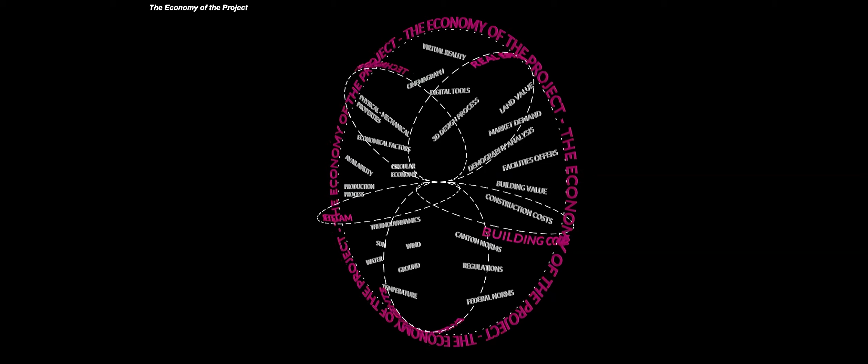I will try now to show you some recent projects, focusing more on these clusters just to make it more clear. Then I will end up with two built projects that kept us busy for a couple of years.

So the first project I want to talk about, relating more to this cluster of economy and real estate, is a competition we did in Milan. We didn't win, but we arrived second.

The main issue here was about the fact that as architects—and I underline all the time that we act and practice in Italy, so it's a really specific context—we sometimes refuse to deal with the topic of real estate, the topic of economy. We think this is a nonsense strategy nowadays, because as architects we have to be aware of what economy means. Economy is a series of rules that give form to our society, like it or not. That's the way economy works—it's a reflection of the political system of any society.

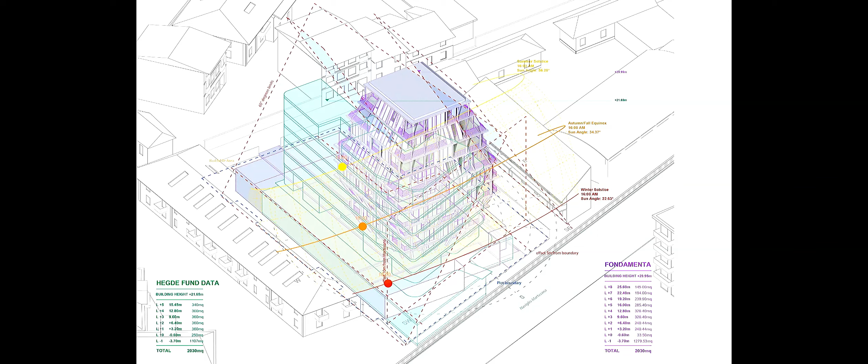Our strategy was to look at the data in order to create a building that, in a sort of cynical way, was producing more revenue for the company. So we stressed the building codes as much as possible, analyzing according to the data they gave us that, of course, if you build in height, every floor produces much more revenue—5% more.

So we tried to stress reducing the number of apartments in the bottom part of the building. For us, it's a tower, even if it's 8 floors. We tried to get out a business plan for them that was more efficient—one that would have produced more revenue for them.

According to that, we treated this building as an office building. It was all thought out with a center core for installations, staircase and lift, with all the structure on the perimeter—this idea of a prefab structure, really easy and fast to build, with installations put on a fake ceiling, moving everything onto the ceiling rather than the floor.

This produces the possibility of different floor plan scenarios, because, as we saw yesterday in Ambra's lecture too, when you work with contractors, what doesn't make sense is that when you design a building, you design it two or three years before it goes on the market. So the moment you design it probably won't match the actual market condition when the building is finally built.

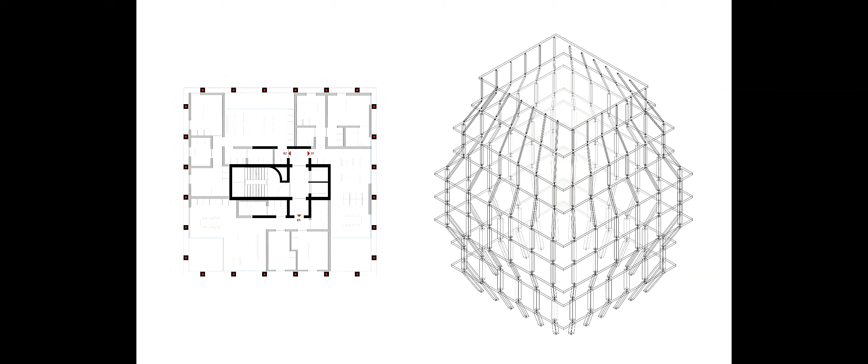So we produced a series of floor plans, saying we don't believe in this idea of flexibility—architecture cannot be flexible somehow. The idea is we build the structure first, the skeleton, and then during the process, within this dimension, this square footage, we can always apply a certain number of apartments on each floor.

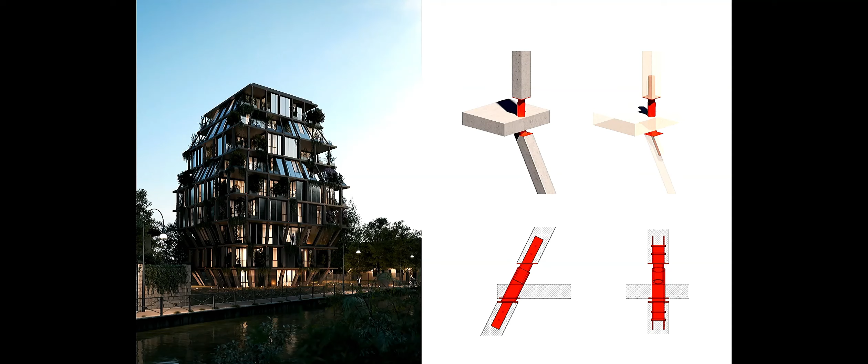And this, according to the market demand that you will have when you're going to start to sell the building, that is not happening at day 0. So this was the result, as said: about 8 floors, in between 20 and 27 apartments. That was the sort of ratio.

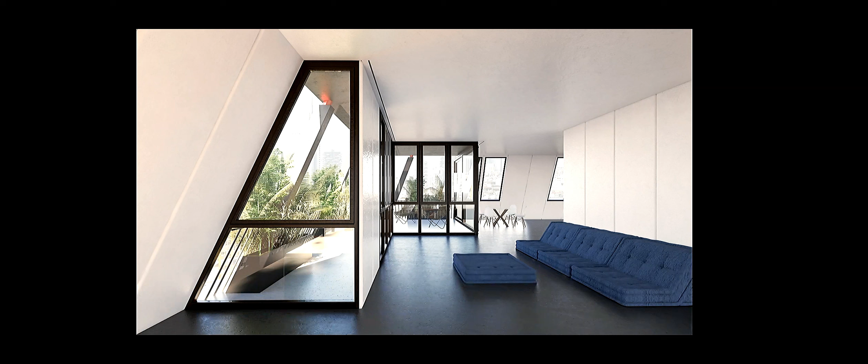We are interested a lot in having an impact on the way people live in our architecture. We are interested, at the end, in producing spaces as architects. And all those constrictions that we create ourselves have to have an impact on the way you perceive and live the space. So all these inclinations that result from the combination of regulation plus economical thought then have to have an impact on the space. For example, it creates a series of variation, even though the apartments are quite basic, where the structure and form of the building has an impact on the apartments themselves.

The second topic I want to reflect on with you is this environmental context. We love this documentary from Godfrey Reggio called Koyaanisqatsi, where he basically, for 10 years of his life, went around the US with a camera, just making a picture of the different contexts you can face in the US landscape. And nowadays, as architects, as also a young practice, we had to take a sort of position regarding the fact of building. Starting by the fact that we believe that building is the least sustainable thing you can do—that, for us, is a sort of status quo.

We want to reflect, rather than talking about sustainability, about how to use energy. It's more for us a sort of research into the possibility of giving form to energy, rather than thinking about installation of equipment that could make a building more efficient or less efficient.

We do this through really basic thoughts, because we always think that nowadays we forgot about our history and the fact that there are buildings built like 4,000 years ago that work much better than today's machine-driven buildings. So the model we have in the studio regarding energy is thinking high-tech but building low-tech. It's really about understanding the basics of what environments exist nowadays. If we reduce it to the minimum, it's about understanding the condition of the sun, the temperature, the soil, the water—really basic thoughts—and how we can translate those environments into space, into architecture.

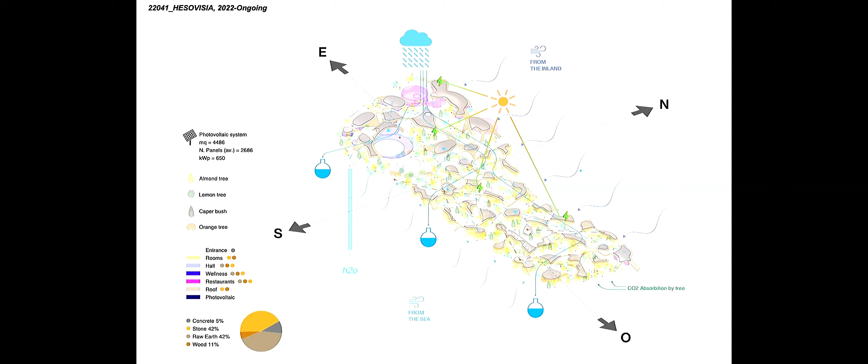But the ultimate goal of this project is to try to give form to the building according to the energy we produce, from which we give form. So we're going to use the water that we extract through wells, we're going to use the sun, and we're going to use a sort of recycling of this whole system. The building is a series of rooms that sit just under this roof, this photovoltaic roof. Sometimes those rooms are underground, sometimes they're on the ground, and other times they're hung on this structure.

So basically, it's a basic conception of creating two systems that are not intertwined. There is always a sort of gap of air in between the rooms and this shelter—like normal construction, if you think about how people normally build in contexts that are super hot. So creating a gap between the building where you stay and the sort of canopy above.

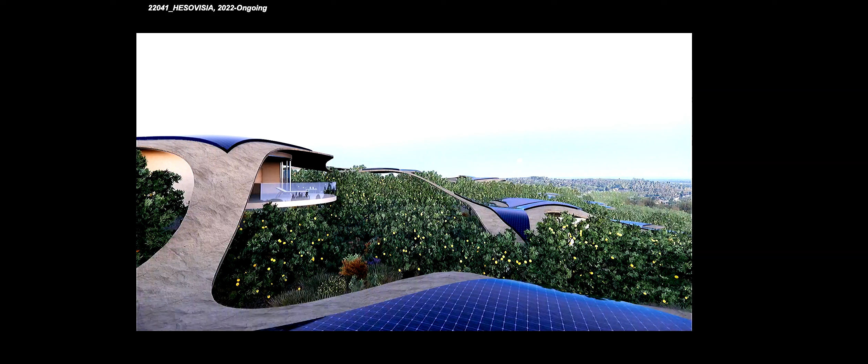This huge canopy also gives the possibility to walk through the structure, always outside, never inside. It also moves through different heights, according to the fact that we are studying how the air, the natural ventilation, could flow through the building. So it's also about the air and the circulation of these fluxes—it gives us criteria to understand how we take position, how we define criteria.

The third project that reflects upon this series of clusters is the one of the building codes. Coming from a Swiss context, this could seem like nonsense, but you have to think that in Italy, each city has its own laws, each village has its own laws. So it's the most inefficient way to think about regulation, and it really changes place to place.

So it's really a work to understand norms, not just as a series of rules that frame our intervention, but more as a starting point to produce architecture. This project, now in construction, is about this story.

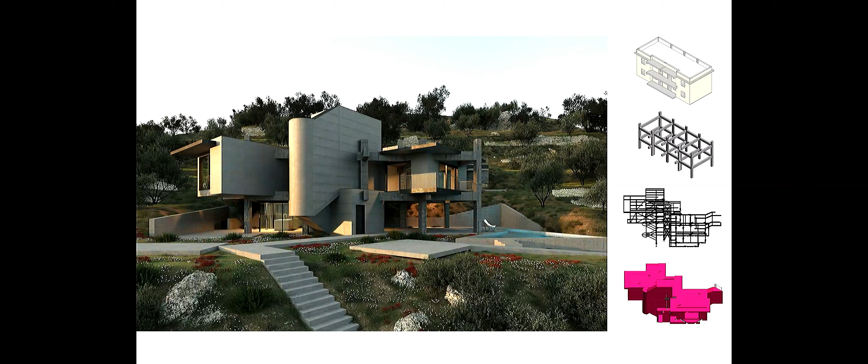So basically what we did is exactly the following: it's a cynical, speculative project where we tear down everything apart from the structure, liberating this domino-system structure. And then we put inside a second steel structure, reusing the volume in a different way.

It's a house, and the idea was to free the ground floor and use a series of rules through which we define the space of the house, creating a dialogue with the existing structure.

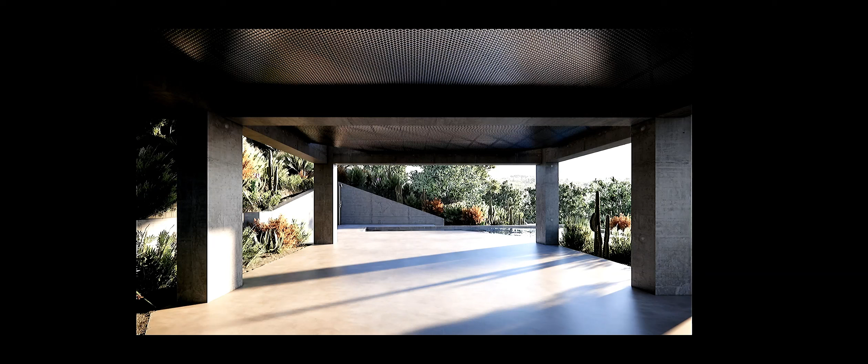We couldn't change the level of the floor, so we had to respect exactly the height of the existing floor. We were quite stuck with the idea of not having too much freedom in terms of height that we had to respect. These are a series of renderings that show this idea of taking the volume off the ground floor and moving it up.

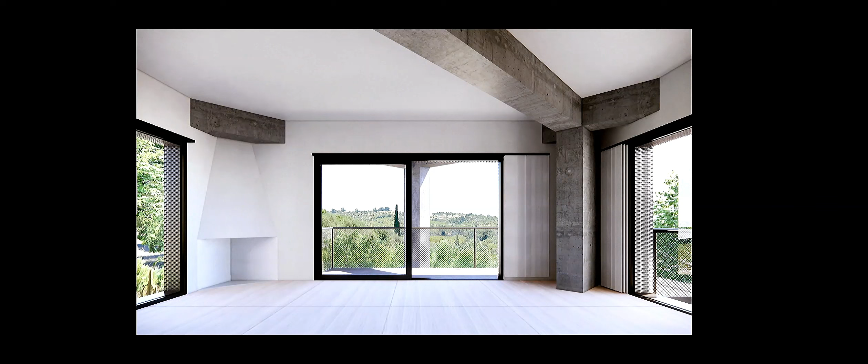On the first floor, the house creates this dialogue in space with the existing structure, where the spaces are defined by the program, from sleeping rooms to living rooms.

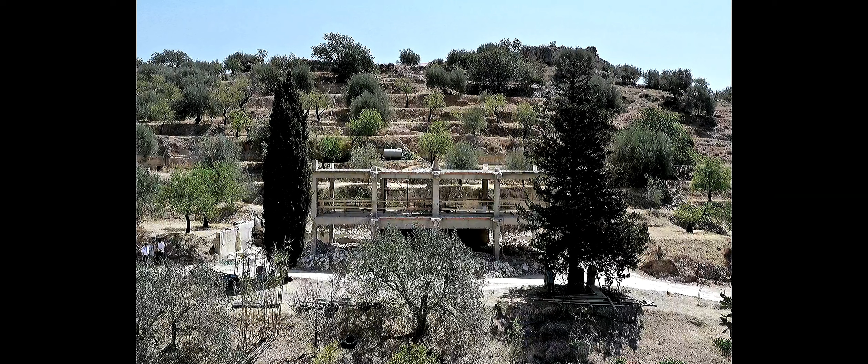In order to control all those things together, this video shows how we coordinate with the people we work with through this technology, where they're not just implementing things during the process, but we work together with this team sharing a common language and technology. The building is now under construction.

These pictures show exactly the demolition. This is the existing structure where we took off 3 centimeters of concrete just to be sure the structure was working, because the steel structure we put in had to be supported by the existing structure, so we couldn't lay the new structure down on the floor.

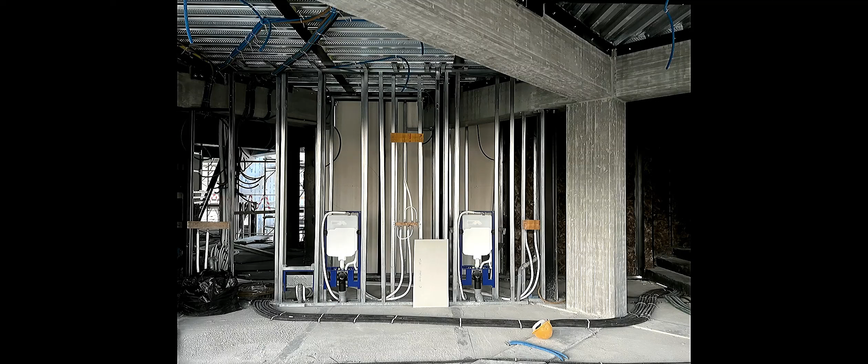Then arrives all this series of light structure. The house inside is really simple, it's plaster, and it creates a series of moments where it starts to dialogue with what was existing.

Basically, in this context of southern Italy, building with this sort of technology isn't too smart, because a light construction in terms of thermal transmission isn't efficient, there isn't enough mass.

So what we did is cover the building with this net to create a ventilated facade. We deliberately decided to wrap the skin in order to make the building ventilated, just because we didn't have enough centimeters, enough dimension, to create proper mass. The building will be finished, hopefully, in a couple of months.

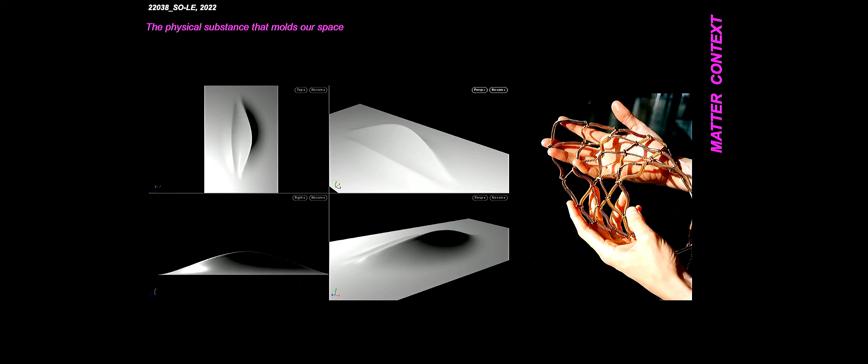The fourth episode, relating to the cluster we're taking into account, is the one of matter, where we are always interested in the studio to think about architecture as a research, as an open dialogue. So we try to test as much as possible the use of specific material according to structural condition.

In this case, we were asked to make a retail, a 45 square meter retail shop, and it was the first time for us to think about architecture at this scale, for a jewelry designer who was able to have a super small spot on the ground floor of this nice building that opened recently in Milan.

It's a fantastic new square that connects two of the most important points of the city, so it's an open public square. What we did, basically, is we started to reflect on the idea of the designer and her sort of dreams on how she designed this jewelry, about the idea of deformation, about the idea of surrealism.

She is able to produce jewelry that looks super heavy, but they are made out of really thin paper material. She used leather, so she worked with this contradiction. In working with this organism, she called her jewelry body architecture.

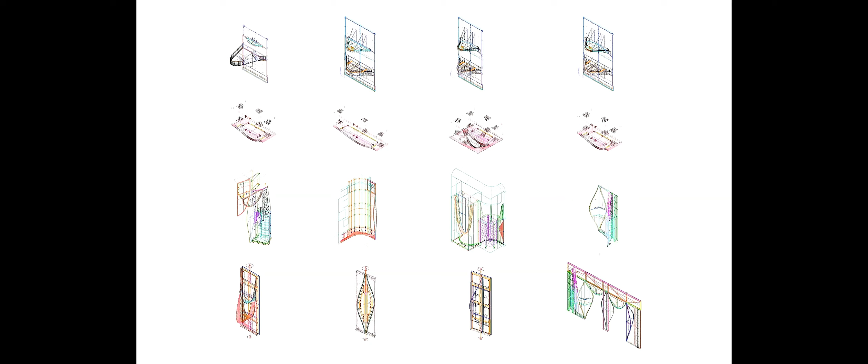It's something really different working on a retail project, because the time is super fast. This project from day zero to the end lasted 5 months and a half, 6 months from first sketch to construction. It also relates to a topic we weren't used to thinking about, that is artificial light. Of course in buildings there is artificial light, but in retail, where you have to put the focus on the products, it totally changes the rules of the game.

It's no longer about the space and the human being, it's more about the space and the object you want to highlight. So we started with this digital light model in order to understand how these tactics we used about deformation, so pressure and depression of the surface, could have an impact on the light.

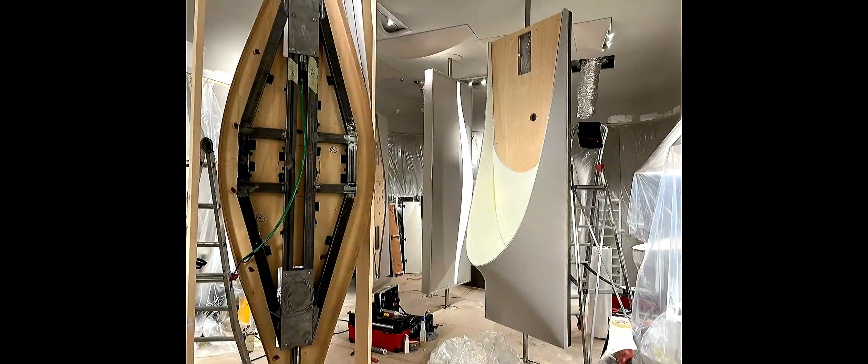It was really funny because it was always all produced off-site and then mounted in 7 days, basically, in the shop. The floor is made of rubber, so it's really soft. The idea was to be able to put these surfaces also on the floor, trying to use material according to the possibility of walking and living in a space.

They also change the anatomy of the body, so the space should, we hope, have an impact on the body from an anatomical point of view. Those are pictures from Mikael Olsson, a photographer and friend of ours, who took snapshots where you can see the jewelry always placed on the surfaces, sometimes laid down or hung upon those elements.

So basically those were the intro relating to a more recent project. I just want to close with two buildings. The first is this winery, basically the first building we built, a project that we started in 2016 and was then constructed and finished in 2020.

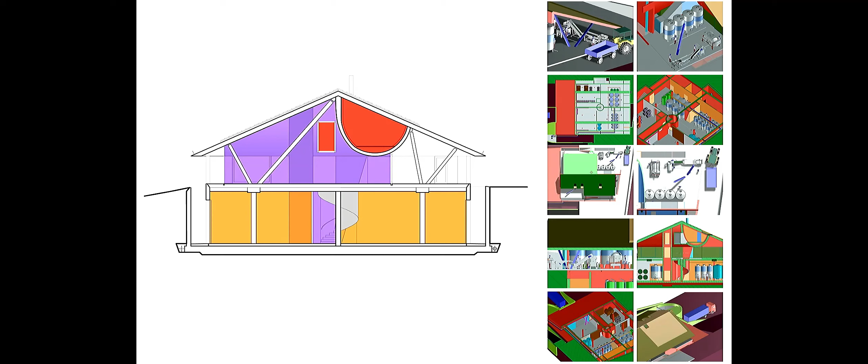So the building is all about this roof, and the fact that this roof conceives and produces the organization of the space.

The main elements of this roof are two structural beams that also work as lived-in space - this is where the three rooms are where you can sleep, also defining the space underneath. It was done through formwork that was suspended for the entire construction.

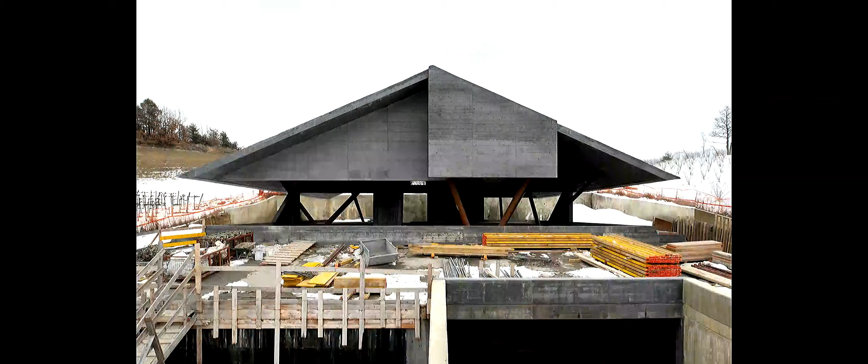It was quite an effort to build, because the entire structure only started to work the moment we poured the roof. We suspended the entire structure for 8 months, and the only moment the building truly worked was as soon as the roof was poured and all elements were working in tension and compression.

On the underground level it's out of pillars, out of concrete, and then from the ground floor these pillars start out of steel, because steel was the better solution for the loads they had to take - these tension pillars don't work in compression, but in tension.

This is the moment - these are pictures from Mikael Olsson - where the organism declares its independency. So the building, for us, was conceived.

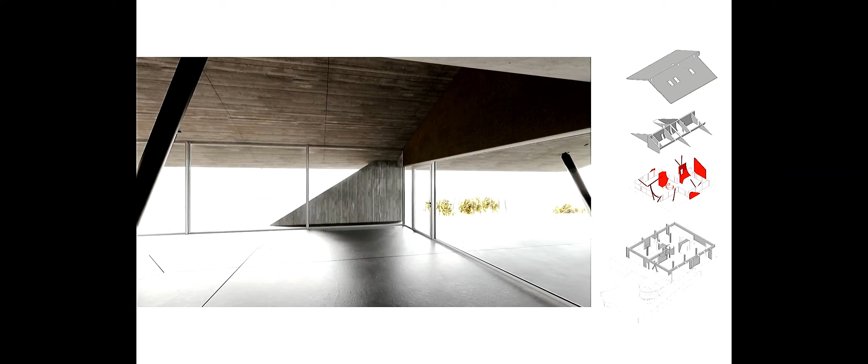After that moment, this idea of adding layers into the building arrives constantly - not trying to disguise the fact that there's a structure, a series of layers that make this organism work, but showing off the fact that all the other layers, like windows and these pipes that form a corridor, were just attached as an addition of elements that make the building work.

As you see, the space has no walls, but is divided by the form of the roof and the position of the glass. This is the finished building.

We are here on the ground level, the mid-level, which is also the entrance, where two things happen at the same time: the entrance of the people and the entrance of the wine. The wine goes in on this level, and by gravity goes down, arriving in the basement, where we have a really rational building floor plan.

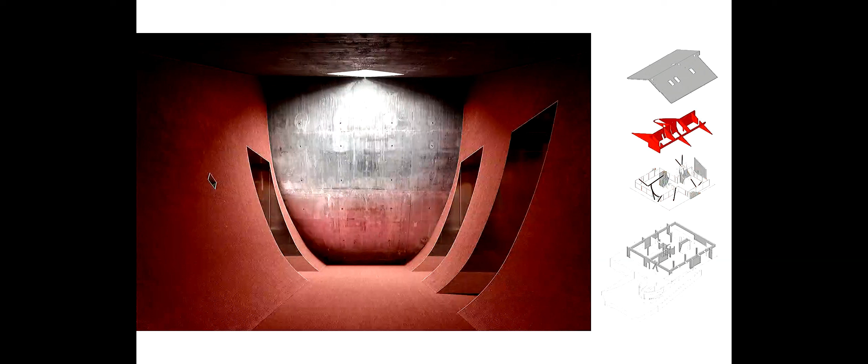It's divided into 4 areas that are the areas of the production. Going up again on the ground level, you see this vertical concrete shaft and this pipe that is a corridor that brings you to the rooms. And those are the sort of compressed rooms where you can sleep.

From outside, we actually like this tile that we were forced to put in, but we understand that all the buildings in the area are covered with these tiles. Still, we declare that it's a juxtaposition on this roof.

And then I close with this project called Experimenta II, which is something different. It's also a territorial project. We are in Sicily, between Noto and Avola, where a client asked us to find land for making a house. We ended up finding a bigger area, so we were able to follow the whole process.

We found this abandoned area in this context, which was 21 hectares. It started a really long process of finding other people interested in taking part in this project. The project is about reusing these 21 hectares as agricultural land, to reproduce lemon trees and olive trees, and to place inside the minimum amount of infrastructure needed to make those things possible.

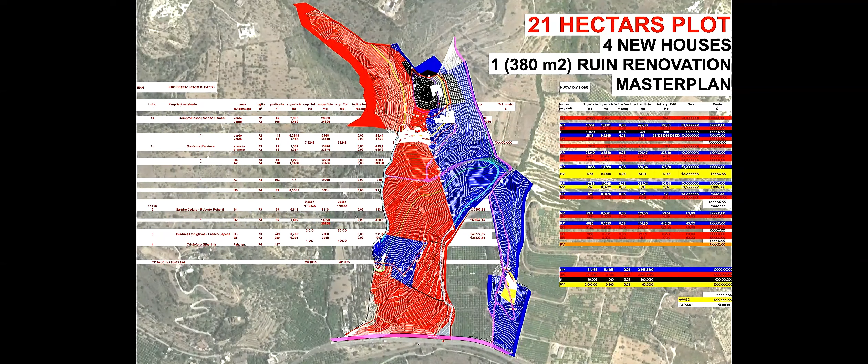So what we did was find people who believed that speculation in this sense would not have been the solution, but that we should give something back, not just say you buy 21 hectares and spend a lot of money to raise lemons.

So we basically started with research on defining the precise spots where we place the infrastructure, where the idea was to relate to this specific, quite crazy context that we have in the area.

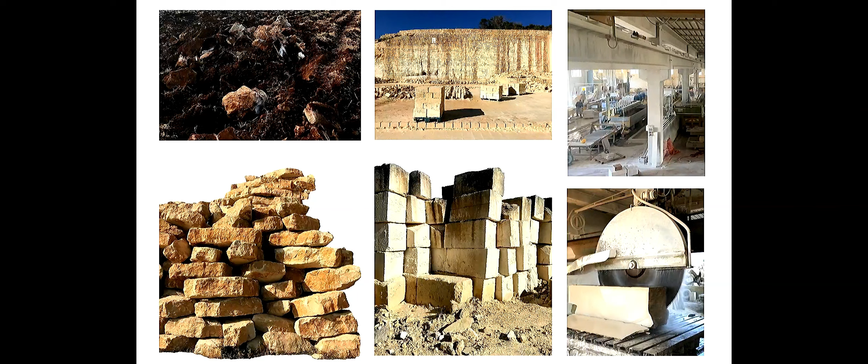On the second layer, we were interested in working with local material and doing research on stone, since this area, because of earthquakes, is a SISMA 1 area, meaning it's really difficult to build. For 30 or 40 years, they've used stone just as a finishing, not anymore as a structural material. So we started from the beginning to understand what the possibilities were with stone.

We had two possible stones. The one on the left is called Modica stone, and you find it not through excavation, but by digging into the land. It's like a kind of granite stone, so more performant than a concrete wall.

The one on the right side is called Noto stone, and it's the one used during the Baroque period to build everything. It's really fragile, so if you use it structurally, you have to use big format. So at the beginning we started this research, understanding where this stone was, how much it cost, and how we could reuse it in terms of technology.

Then, of course, we put together the third layer, which was understanding the context in terms of history. The Sicilian Baroque is a really specific Baroque that has nothing to do with the Baroque we know more as architects, like, for example, the Roman Baroque from Borromini. But it's a Baroque that manifests itself in the open space, in the public space rather than in the buildings.

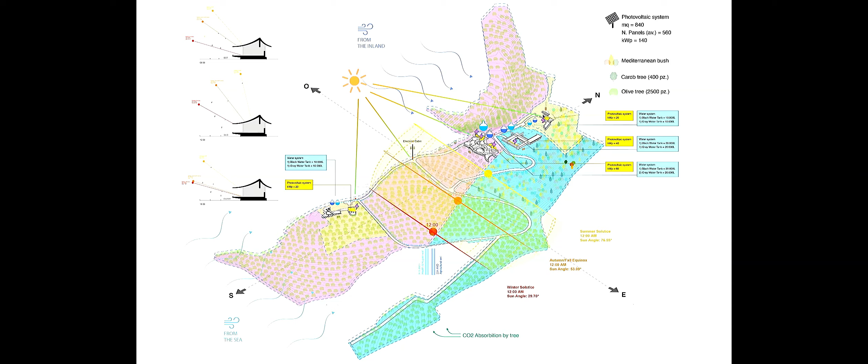Similar to the hotel, all those buildings work with the same water well, and they try to be efficient in the fact that they use energy through just solar panels. This was really important for us, to find an economy of means in doing four things into this landscape.

We call it infrastructure just because we deliberately decided to let those buildings not belong to the world of the house, but to the world of the infrastructure. Touching and designing into this landscape is anyway a brutal act.

We believe that understanding those houses not as normal Mediterranean houses, if we think about the Rudofsky references that were shown yesterday, but more as a new way of living, the outside covered space could have been a solution, or at least this is what we were comfortable to think about.

So you see the 4 infrastructures, 3 of them are built. The one in the middle is not, it won't be. I'll just go through this series of pictures that are from a couple of weeks ago. So this is the first one.

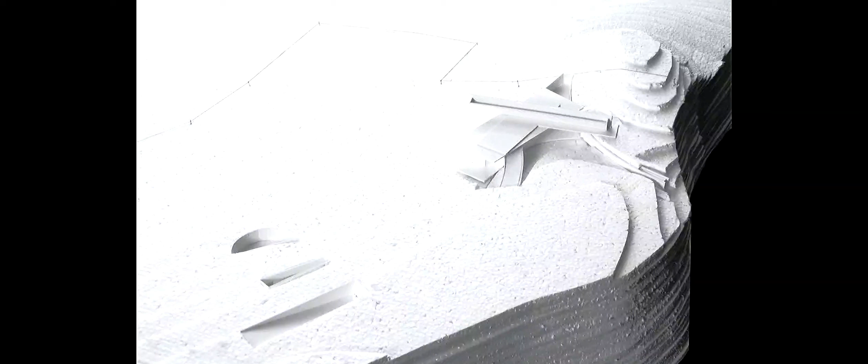It's an infrastructure that works with the idea of something going through all these houses, to compress as much as possible the moments where you live into the space. So compress the closed space of the house and expand, through the dialogue with the landscape, the outside space.

So you have the rooms on the right side, the living is on the left, that is divided in 3 parts. Then you have this tank, this pool, that is used as a tank for recycling the water. But of course, you can also swim in it.

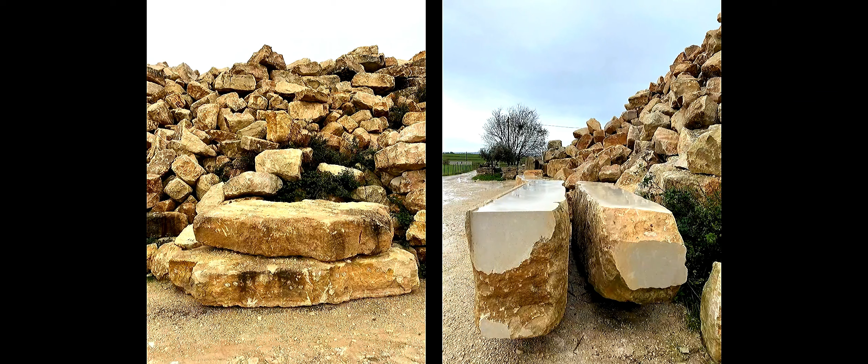The main structural point or issue on the construction was about this element out of stone, this Modica stone, where we built up walls according to finding those pieces, understanding what was the structural potential out of that, and using it to support and divide the space.

So this is basically the wall where on top sustains the slab and this tank. This tank was done out of steel, built offsite, and I put it inside. And the house basically...

tries to change the way in which you should live into this ecosystem, which is more about compressing the spaces that are inside.

All the roofs are designed through the fact that the sun should never touch the glass, the sun should never enter the space. You enter them from the living room into this sort of tunnel that is 25 meters long, which brings you to the rooms that are excavated into the landscape.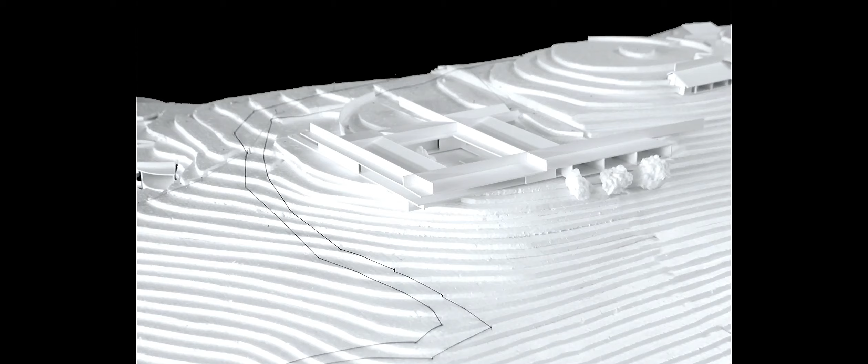The second is an infrastructure that works on just one level. Let's say that we define this moment of the hill that is more placed on the top, and we compress all the spaces that were closed spaces through a series of walls out of stone.

Trying to define what was the minimum space to be lived inside, and building almost double the space. So all those houses are bigger on the outside covered space than inside, through these series of shells that define how the light should get in and how you should protect yourself with shadows.

It's, let's say, basic in terms of construction. So the company, a Sicilian company, used proper old school tactics to make, for example, the formwork and to build it. It was amazing to build up the process with them.

This project at the end took 5 years, so it was really a long process in order to arrive to the definition of this exterior covered space. Also here, the tank is placed on a beam.

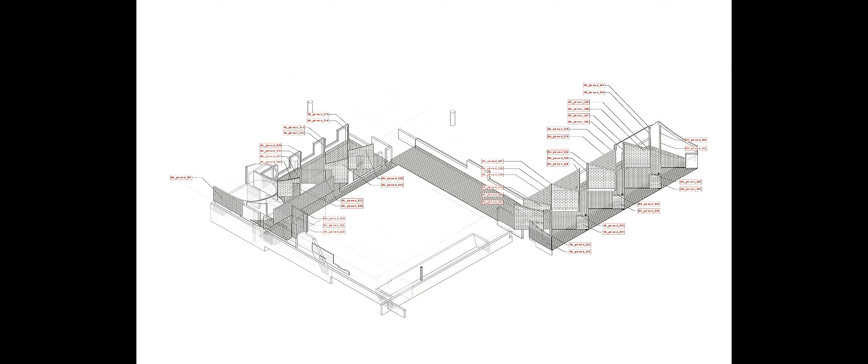As I said, this is the series of walls out of stone that in this case are not structural, but they define exactly how it's possible to live, where we always compress the space they bring you through the rooms. In fact, the inclination of the interior space follows another logic.

It creates much more the idea of having this roof flying over your own roof.

And then the third one is basically the smaller one, but it declines the same principles into this series of infrastructure. Even in this case, the infrastructure is formed by the simple idea of having an area that is the sleeping room.

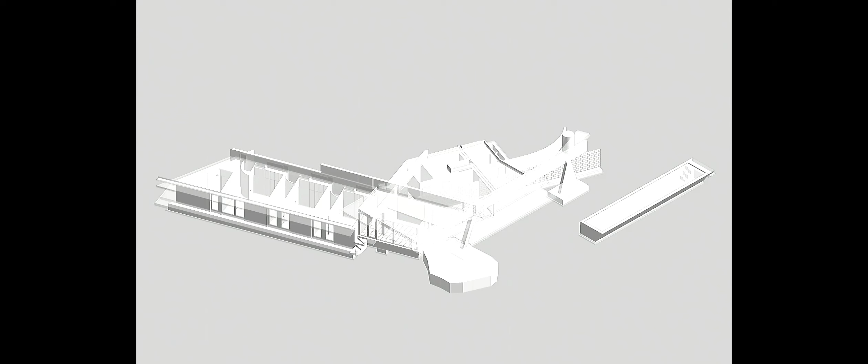facing east, northeast, and the living room facing north, through a series of beams that define exactly the moment of how to hang these two different roofs.

In this case, we tested with this Noto stone the possibility of building also structural walls. So it's a series of stones that are tied together with these dowels, so that if there is an earthquake, they are able to move.

We hope so. This is basically the house at the moment, where the ratio between inside and outside is almost always equal. Even in this case, you move through a compressed corridor in order to arrive at the views.

I close with the one that was not built, and of course it was the one where we put the most effort, as always. It's about an infrastructure that reacts to an existing water tank in this case, so the water tank was given. This house reflects on the possibility of reusing a sort of morphology, and making up through the three-dimensional axis of this morphology the creation of space according to the given program.

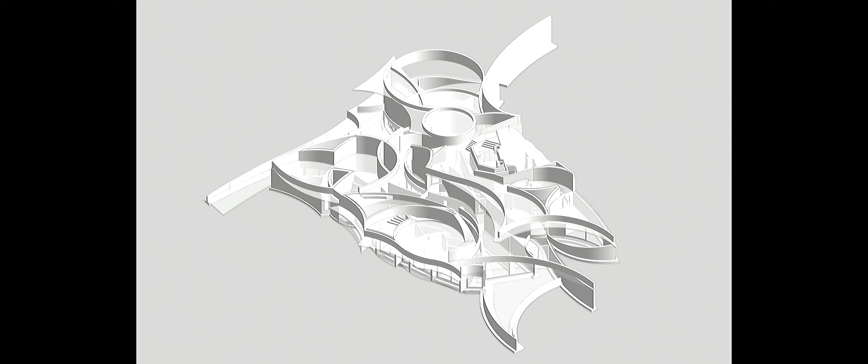The idea here was to build everything basically out of stone wall, so 90% of the wall, and through the ideas of deforming or metamorphosis of the space, the wall became beams, the beams became floor, just using obsessively the same sort of logic.

The house in this case was 80% underground, and it gets light through courtyards. Even in this case, the project stopped on the first day of the construction building, so it was killed at day one of the construction process.

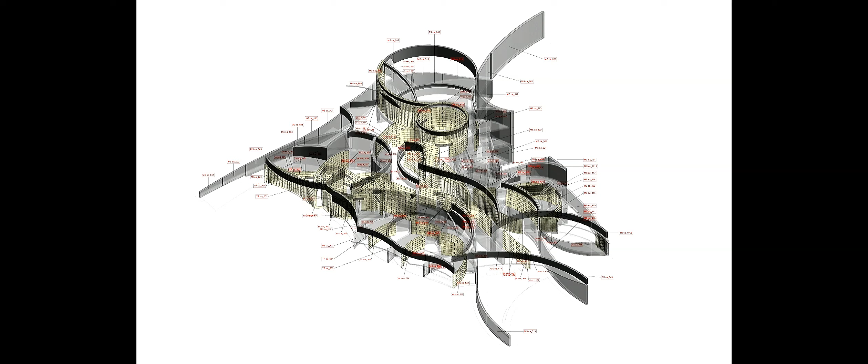So we were able to arrive at the end somehow through the control of all the parameters that we were making up in the office. For example, just to give an example, we were able to control also the construction of the wall. We always go through model to real model to digital model. It's a mock-up, one-to-one, that we did in the office.

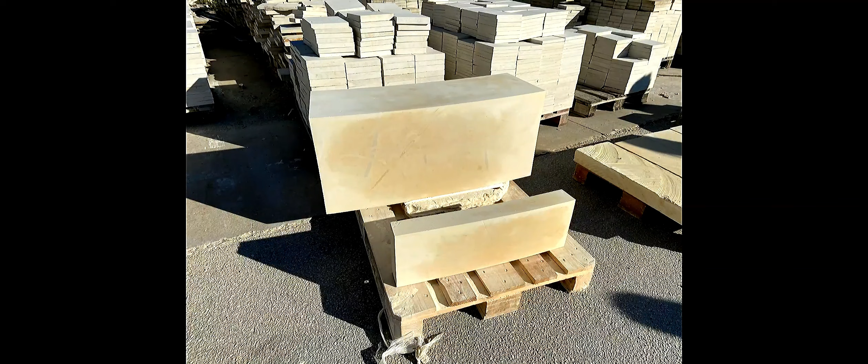We always close this project with this module, the module that was done through the concept. So we started through the concept with the possibility of how to build it, and then tried to work out a discourse out of that.

Yes, this is the building. I'll just close with two slides, more related to the things we are doing with the students here, about how we tried last year to bring this idea of methodology, this economy of the project, into the university. There was a course, two semesters at the ETH, where we basically tried with students to implement this idea of having a methodology and applying it to the project.

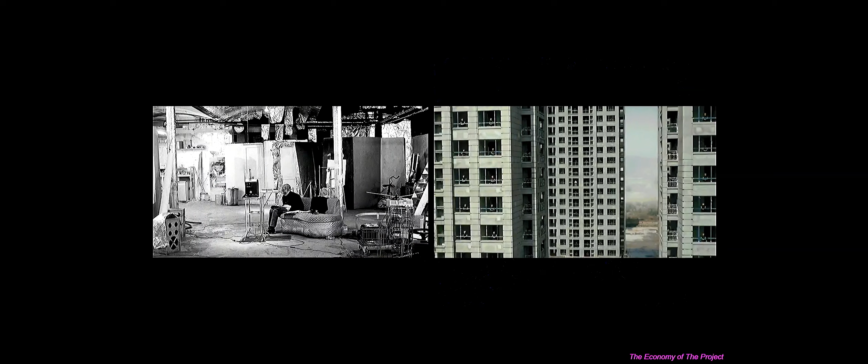So, how to extrapolate data from a context that was Switzerland. We defined an economical context as Switzerland, then went through a selection of plots through companies, and worked with the students using just economical parameters—so no program, no user, nothing. Extrapolate the economical parameter the company wants to achieve on those areas, and out of that, create your own building, your own program.

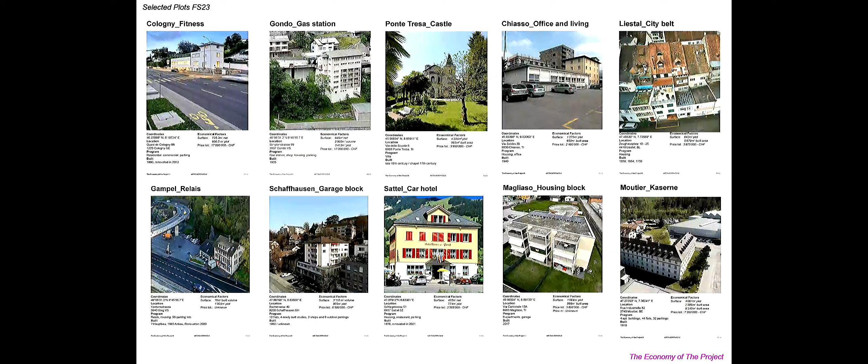The first semester was done on a free plot, and the second semester was done with a building taken from the real market, but an existing building. Then we made up a sort of manual about this methodology, with chapters giving a toolbox of how to relate to this cluster, how to read economical data, how to extrapolate environmental parameters—a sort of toolbox we were able to extract from the Swiss context.

If we had done something like that in Italy, it would have probably taken 10 years. We were able to do it because all that data in Switzerland is open source, most of it. It was crazily nice how you can get data and information according to different clusters.

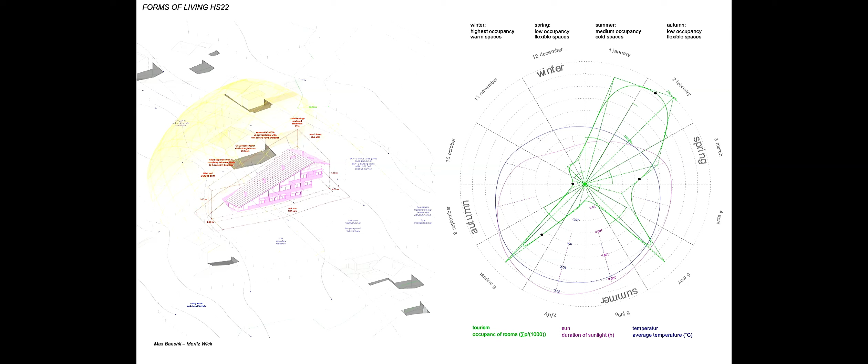The idea with the students was to give form to strategy, always deciding which of those parameters could make sense in terms of economy, twisting the paradigm. These are examples from students where they worked a lot on drawing and legislating, let's say, mixing together economical parameters and the idea of having a strategy that has an impact on space.

We then implemented this idea of a technology called cinemagraph, where the ultimate idea was to represent space in movement—but not the movement of the body, the movement of all the layers that are normally difficult to give form to. It was a nice trial, let's say.

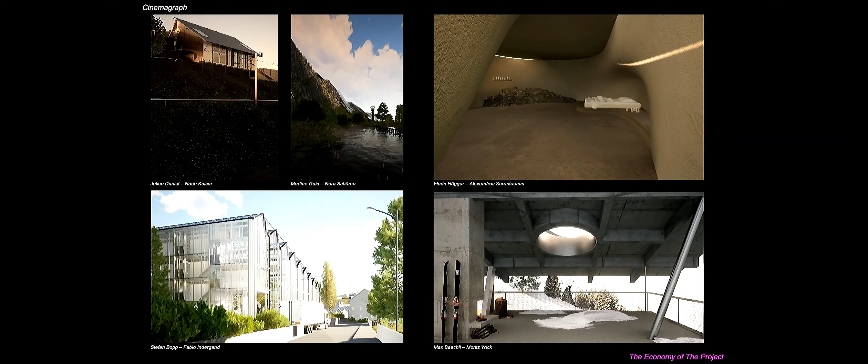Thank you, Federico. Does anyone have questions?

Thank you for your presentation. You started talking about the Italian context, and my question is specifically about Milan. Every year there are at least 6,000 more architects there, which explains why it's difficult for young architects to emerge. I'd like to ask: what did you find most difficult working in such a difficult context? And what was the approach that made it possible for you and Fondamenta to emerge?

What I still think about Italy is that it's a country with huge potential and possibility for architects. The problem isn't really a problem—the possibility is plenty, there's a sort of void where there's a need to build, a need to do a kind of building architecture. The real problem is more about the system—it's really difficult in economic terms to make an office survive.

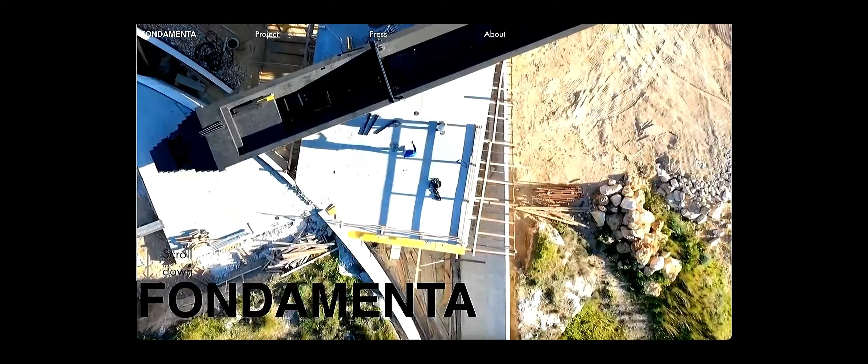The most difficult thing was that for the first two years we were just trying to find projects and find someone who believed in us, because you can't really count on public competitions the way you could, for example, in Switzerland—even though in Switzerland it's not so easy now either in terms of numbers. But there, you can't count on the public sector at all, that's for sure.

We do two public competitions every year in Italy, and we do it as an exercise just because we want to work at a different scale, since we mainly work on private projects, small-scale things, or housing.

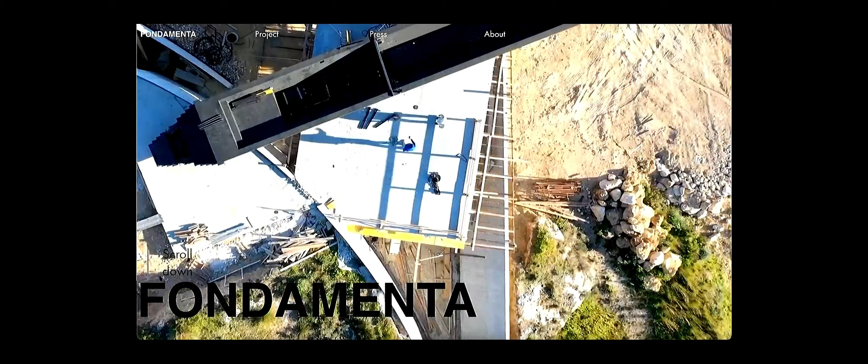During those two difficult years at the beginning, we understood that most of the potential clients or people we were talking with weren't interested at all in architecture—they were interested in talking about architecture in another way.

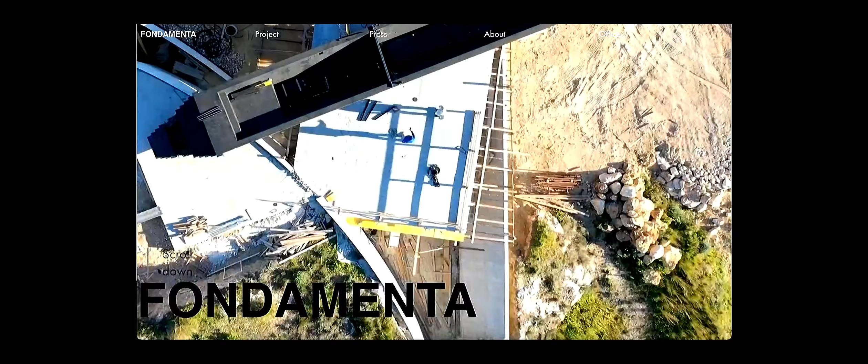That's why we implemented this idea of also talking in economic terms. We tried to switch the paradigm of how we confront ourselves with clients or contractors—trying to speak through their language, their meaning. Because in the end, they're not interested in what kind of building or architecture you do.

They're more interested in whether you earn their trust—or maybe not trust exactly, but whether they give you a job. If they understand that you're able to understand their world and how it works.

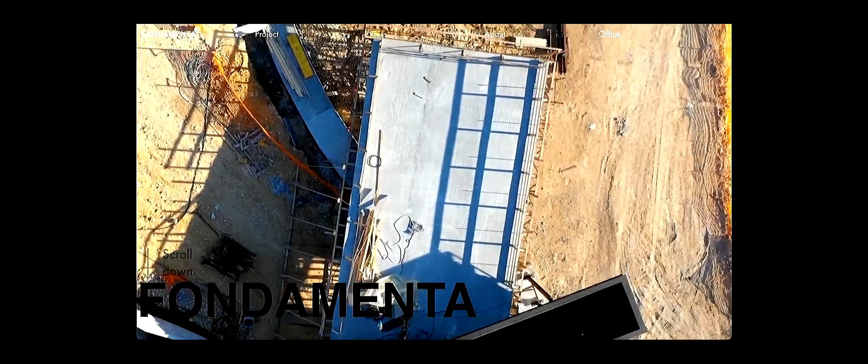So that was the most difficult thing—we completely switched our way of working, we adopted this approach, we entered into the economics of the project, not just because we wanted to, but because we saw it as the only way to face the Italian context and change the attitude: not positioning ourselves as the architect who arrives with ideas, but as one who tries to understand the context and works through those layers as a design principle.

I think that's what made it possible for us to survive—this twist of introducing, from day zero, layers or forces that you normally wouldn't count from the start, talking about Excel sheets to explain a concept. This is basically what we do, in order to have freedom afterward in producing the architecture we're interested in.

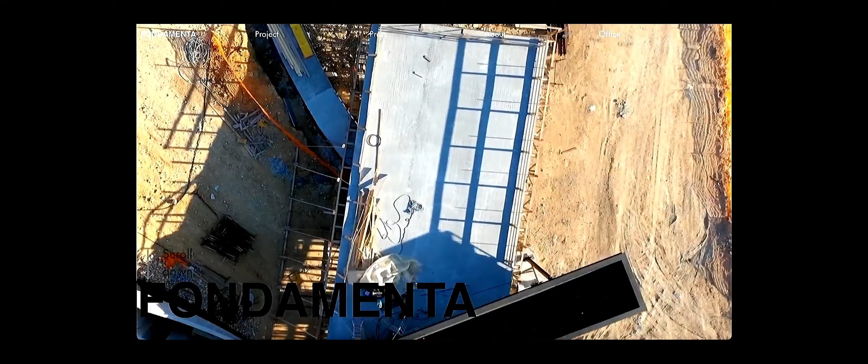Thanks, Federico, for this incredible presentation—it was really inspiring. Starting from the last thing you mentioned, the term freedom, I'm really interested in the method, the process you apply to the project, to the design.

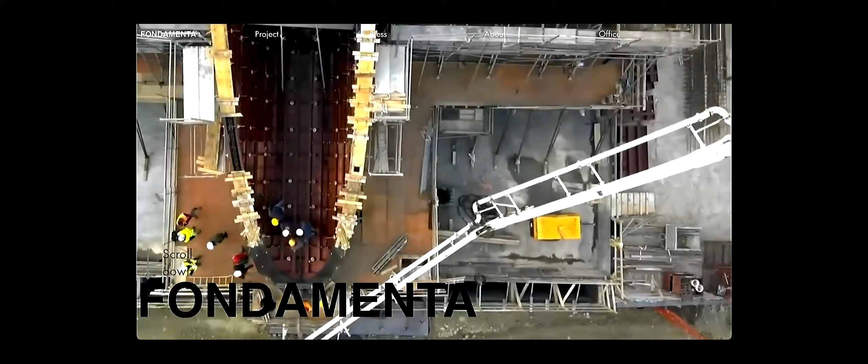Meaning it seems to me that there is a huge amount of discipline and control, and then also a certain degree of freedom at the end. I would like you to address further this topic and this relation of control, discipline and freedom, both in the process of analysis and in the design process.

Yes, basically the first part of each project is about collecting data and giving form to data without having any sort of architectural intention. It's more an analysis work of understanding how we could project those clusters in form and in space, combining together what is possible, what was already a form belonging to these hidden layers, hidden forces. Of course, our ultimate goal is to produce architecture that also follows our dreams, our research, our idea of contradiction.

But this comes through the process, basically. So each project starts really in a pragmatic way, giving form to those data and giving form as an exercise to all these constraints. Giving form to these constraints allows you to already have a space, to give a space to the constraint, to translate economy into form, energy into form, to give a space and a form to those data. And then it's a continuous process. There is no magic trick, it's just continuously working over and over this process.

Another important thing is that from day zero, the people who decide to work with us using this language, this technology, work with us from day zero. That means that from the first day of research, all the people are at the table. Somehow this helps create a more precise trajectory from day zero rather than implementing it over time. We took a lot of time to create this system, this infrastructure, and it's still a work in progress, but we see that it could have potential. At least it enables us to work and to build. So from now, we keep going on.

Yeah, first of all, thank you for the spectacular presentation. I'm interested in your point of view—what do you think? I know it's really subjective, but how do you see it changing, artificial intelligence, in the way we are projecting architecture? We don't know, but each of us has a point of view on how to handle this.

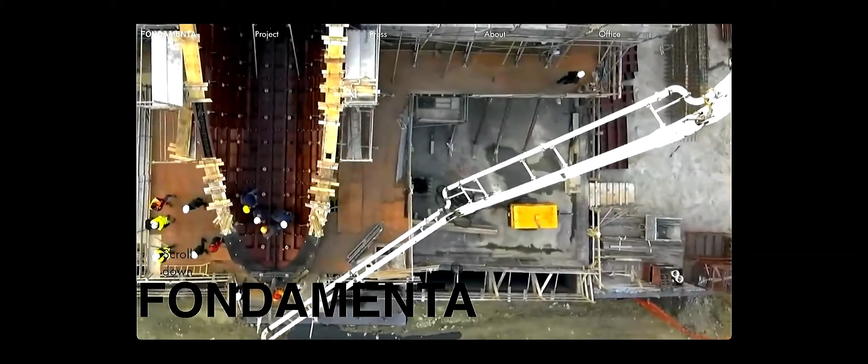Always with it clear in mind that it's technology that we control, not vice versa. So we, for example, are not interested in any parametric design where the design comes out of scripting. That's not our cup of tea, though we respect a lot who does this. But we believe that, for example, the implementation of those things we are using these days into data analysis, into applying form to possibility, or in terms of sets of rules, potential for variation, could be implemented into a process—of course through a methodology. It's not about using artificial intelligence to make buildings, but maybe you can use this infrastructure to speed up the process of collecting data, for example, to give form to data. So for us it's just out of curiosity, to try to see if there's a possibility to intertwine this world with the world of architecture. But nothing more than this at the moment.

Do you think it could take a principal role in the future? Is that your point of view?

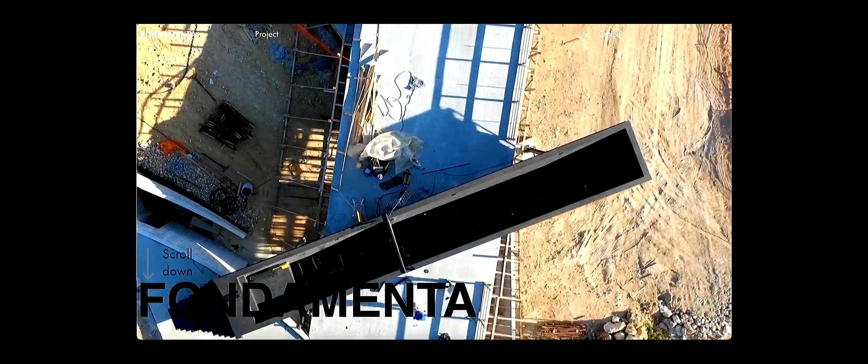Yeah, I think so. It works like neurologic information, so it's really interesting how it's going to be controlled. Here again comes the topic of governance, policy making. But honestly, yes, I think it will for sure have an impact on producing architecture. Then, of course, it's up to us how we want to control this or create a policy out of that. But yes, I think it's a process of evolution to not look at too skeptically, but with curiosity.

Hi, thanks for the presentation. I would like to ask something about what you said about the houses and buildings being controlled by the market. You actually design the buildings in relation to the market.

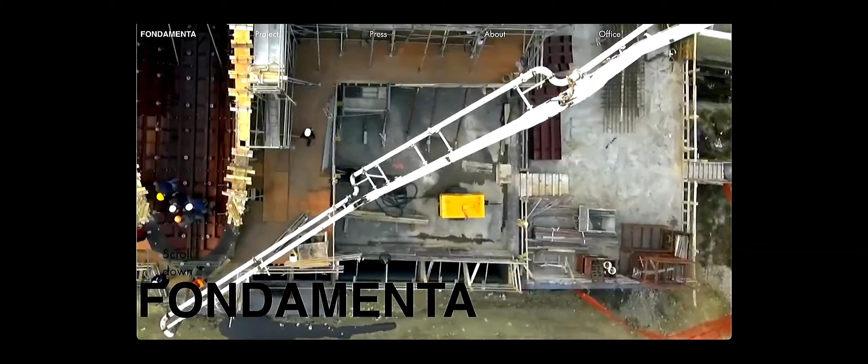Until now, the houses and buildings we build were not so closely connected to the market, so they were not another product from an industry. How do you see any danger in connecting the built environment to a market? When the market changes rapidly in the next 20 years, the buildings connected to and grown out of the market will be useless then. How do we make buildings that come out of the market last longer than a car, a washing machine, or a fridge?

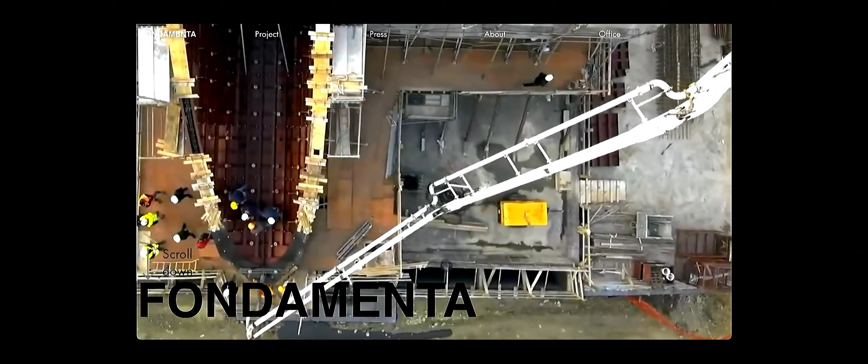I don't have an answer, but it's a nice point to reflect upon. What we're starting to do, according to the fact that working in the Milanese context is all about this, is exactly what you're saying. The question we ask ourselves is, how can we, as architects, have an impact on those buildings and try to understand, reflect upon the relation that market and architecture could have on space. I don't have an answer.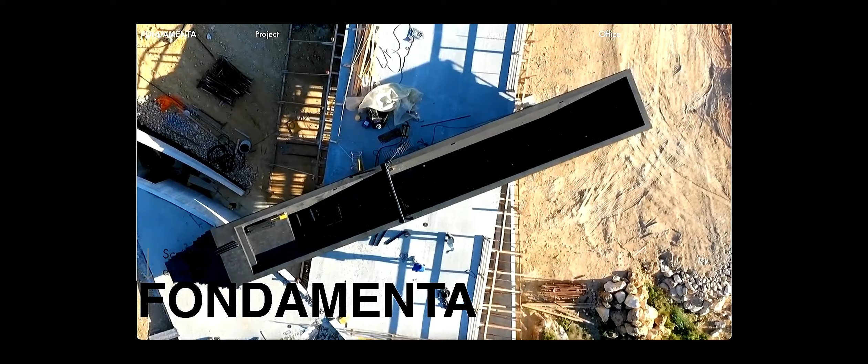One could also take the opposite direction and say we don't have to follow the market, buildings will last forever, or at least 100 years. For us it was a trial to see if there's a possibility of using market as a design strategy. We did this competition as a provocation, saying we never thought like that—what happens if we follow the market instead of being resilient? I'm not even sure what kind of market or society we'll have in 20 years. As architects we should envision or have a vision, but that was a specific point on trying to connect the two.

If you follow the market and in 20 years the market changes its laws and rules completely, what do we do with the building? No idea—maybe we tear it down and build new. It was a reflection on the fact that when you work with a constructor or company, the process of architecture is really long; designing a building is basically always 2, 3, 4 years before it's live. So it was a reflection on whether there's a possibility of switching paradigms, maybe changing the phases, maybe changing the logic of how you project the building into time. It's a fantastic question, something we should reflect upon. I don't have an answer, just trials.

Thank you for the lecture, very inspiring. I wanted to ask about what you mentioned, that you don't believe in the flexibility of a building. Do you think the function of the building is defined forever, or what did you mean by not believing in flexibility?

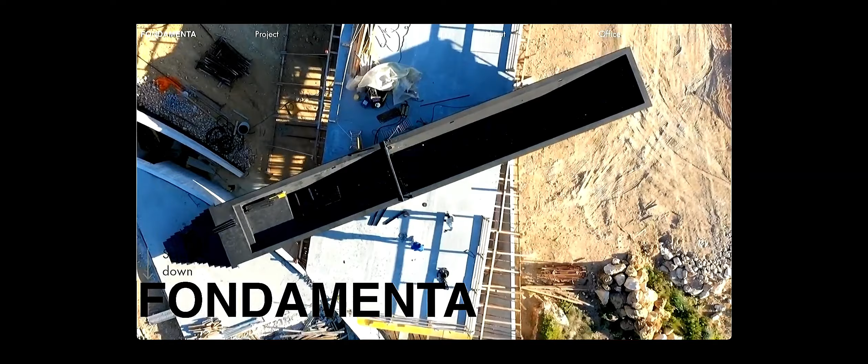I don't believe in flexibility in the sense that as soon as you build a building, as soon as you want to change it, it brings together a series of consequences that impact the building itself, the mechanical system, the infrastructure, the structure. So it was more a statement, a provocation. Believing that a building could easily change—we don't believe in this. We believe more in understanding buildings that could, through time, have a second life.

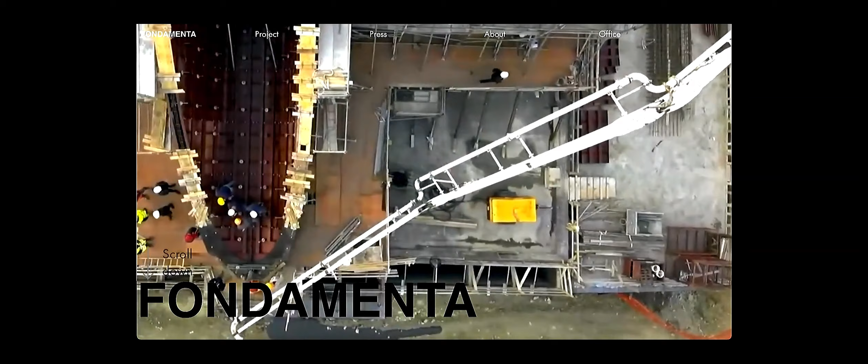This is about thinking on a metamorphosis, not that the building changes just like that. It was more an awareness of understanding that when we design, we project a possible future into buildings, into spaces, and we really try to think what is the maximum lifespan we can embrace into a building. If I think about those houses in Sicily, it was about trying to freeze the time there.

Freeze the time according to the fact that we believe that in this context, the possibility of living outside cover space will last probably forever. So it's not that we don't believe in flexibility, it's about understanding what does it mean when it comes to real life. What could be a strategy, what could be a sort of way of thinking.

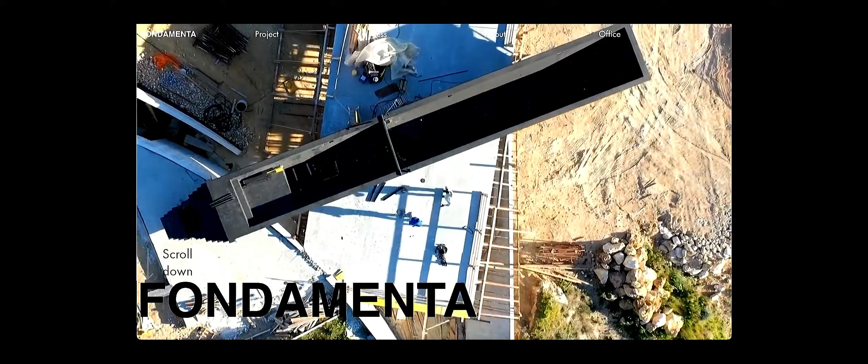We are sort of skeptical with the idea of thinking of building as a machine, a changing machine, a technological machine. We are more into thinking of building as organism, and that means we should try to reduce as much as possible the technological part inside the building. This is what we are trying to apply now, using a lot of technology at the beginning to think about it, but to step back a little from this idea of building as machines. I don't know if it's clear, but...

Hello. Thank you for the presentation. I found all the drawings to be very well aligned with what you were saying, so thank you.

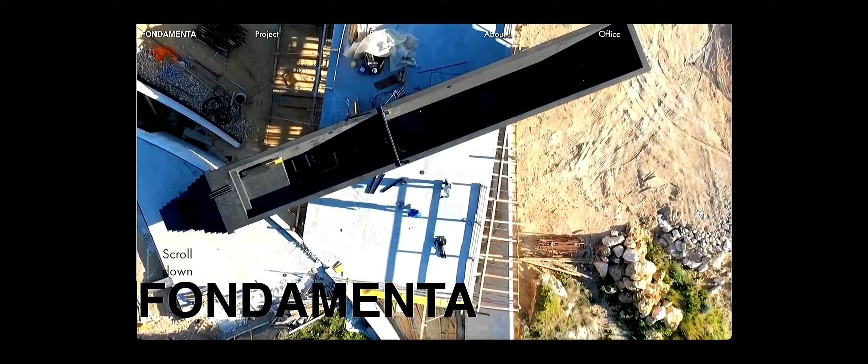I just wanted to ask about the topic of accessibility of a lot of the digital programs like Twinmotion that we've been using, and whether you think this will make architecture a very saturated profession, where we have a lot of maybe lower skill architects instead of a few very highly skilled architects, or whether that's a good thing.

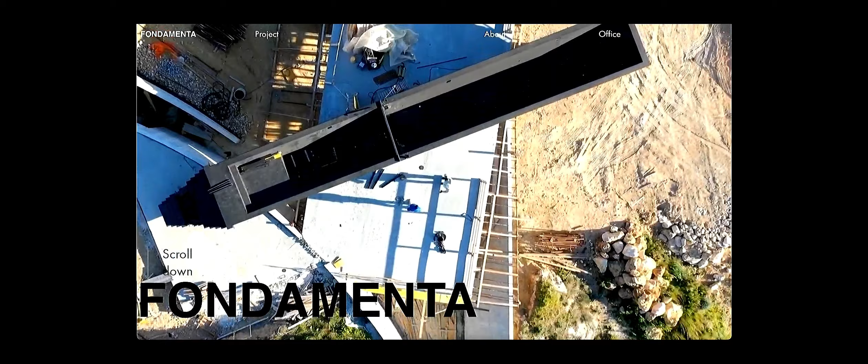Starting from the point that we believe there are multiple approaches to the discipline, and none that is right or wrong: what we are researching is to see technology as a tool, just as a tool, as could be drawing on paper. For us, the implementation of technology, the main reason why we switched to that, was not for representation or aesthetics, but more about implementing the idea of governance, policy making through technology, how to control the process.

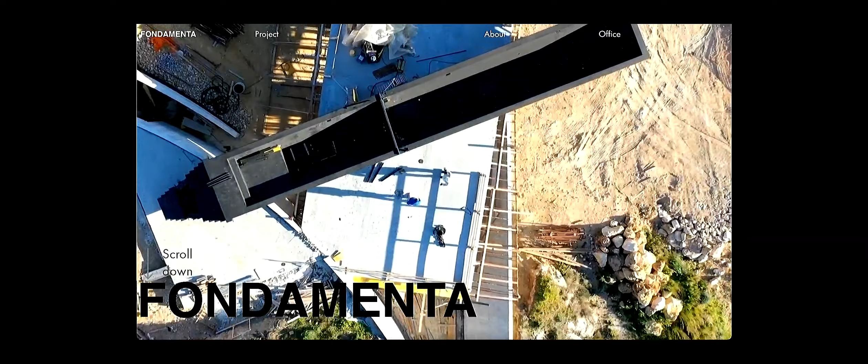Secondly, to use tools that could reveal to us as architects other layers, to give form to other layers, and not necessarily the space itself that you could reveal with a nice model. We do model, we sketch. It's not that we have any sort of dogmatic approach to technology. We see it just as a potential to reveal other layers and give form to layers that are normally difficult to represent in other ways. But that's all, it's just another tool, it's about an architect having multiple arms to use, in our case, to design.

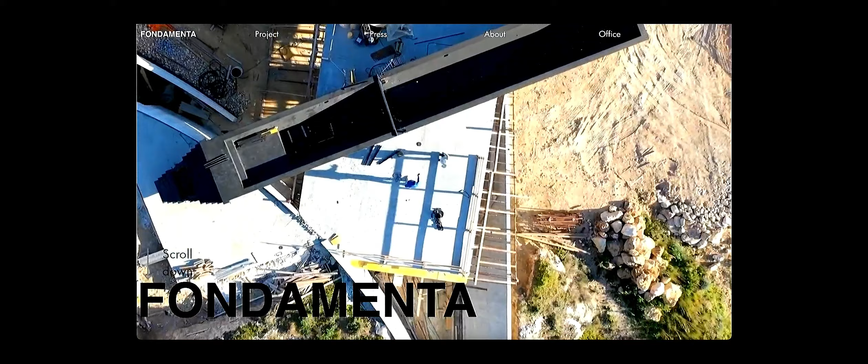No, of course, the presentation wanted to use some projects to extrapolate those approaches. Of course, in any of the projects we try to do, those overlaps happen, as you are saying. This is really part of the game. So the intention of this presentation was to try to divide, even though the idea is to combine, in order to help me and us explain a little better what we intend for each cluster.

But of course, as you are saying, when we tackle a project or research, those things come all at once. And the project comes out of those clashes and contradictions of all these things, of course. Mine was just an attempt to explain what we intended for each specific field and aspect of the project. But of course, we intend it as one thing, as one series of rules or methods that we apply all together.

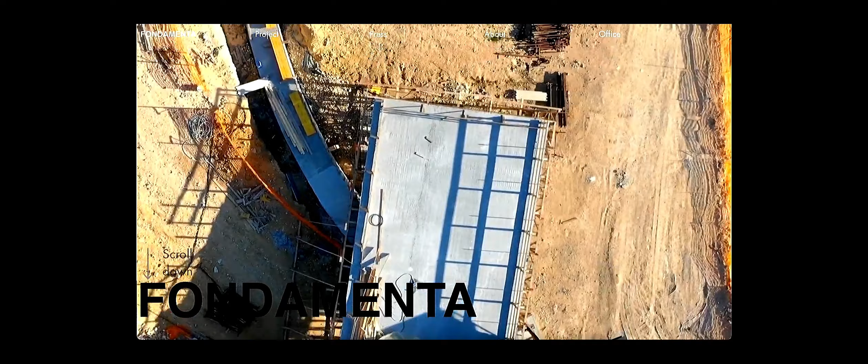Let's say that's something we are building over time. There are projects, for example the last one I showed, that started 4 years ago. It's a process. We are learning from ourselves, we are making mistakes, failing, and keep going on.

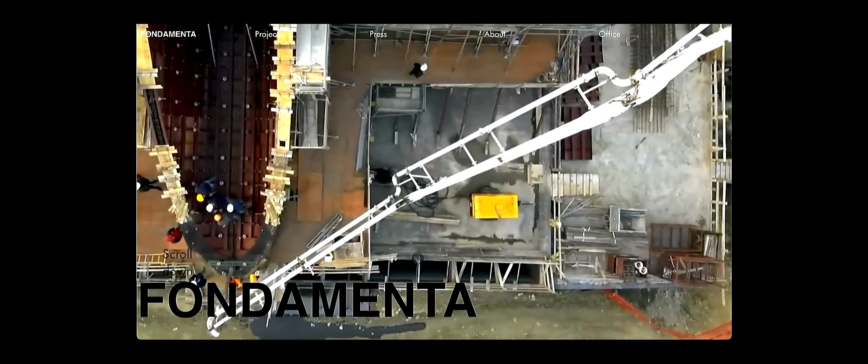So it's always difficult when you do a lecture to try to put a sort of mask over it and say, that's the way we do things. It's a fail and try process, always. And I would say that now we are more conscious, more aware of this process. So in the project we are doing now, we are always trying to push much more.

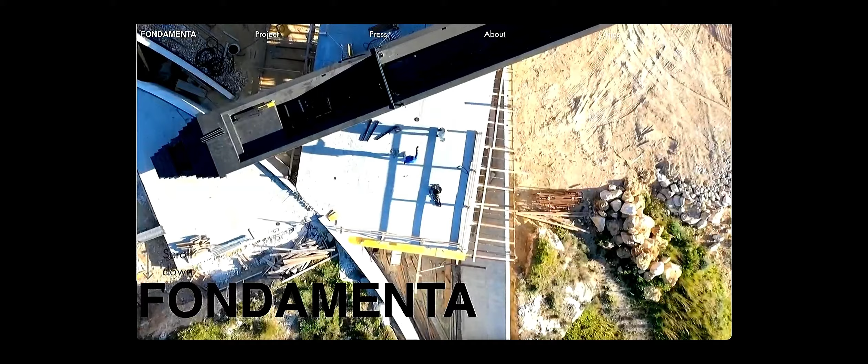If I think about the winery, most of the things I said were maybe up in the air, but not down on the ground. But this is the nice thing about this work, it's a process. You keep going on, you make mistakes, and you learn a lot from mistakes, much more than from other things. So, thank you.